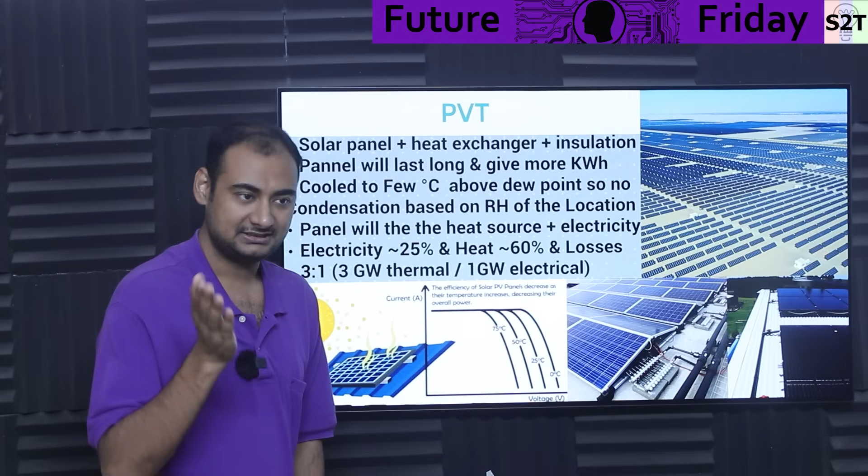You can pull vacuum on it and it boils away at, let's say, 15 degrees Celsius. You can do that. It will still take the same amount of energy when it boils away. So basically, you can change the temperature, but you can't change the phase change energy equation. So you need a bonkers amount of energy. We burn oil on this thing like there is no tomorrow. So we are talking about huge energy.

So this panel will give you energy, and this is where it starts to shine. Solar panels are not that expensive. Even a PVT panel with all the plumbing is only 2 to 3x the price. But here's the funny thing. From a solar panel's point of view, basically the sun dumps almost a kilowatt of energy per meter square. 25% of it will be converted into electricity. Because these are cooled panels, you will get that number. And heat would be 60%.

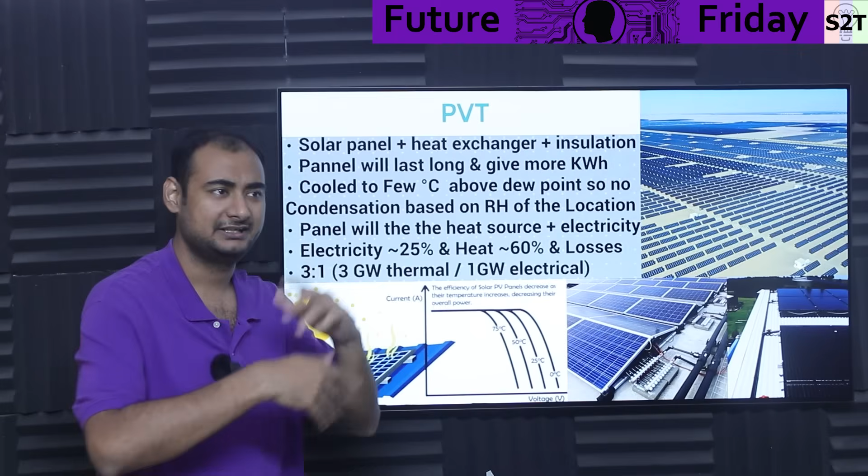Now, it's like, why is heat only 60%? Most of the energy would be reflected or leak into the ambient, so you will not get 100% absorption, so to say. However, right now, things that are in the market that you can just pick up a phone and order give you a 3:1 ratio, meaning if your plate capacity is 1 gigawatt hour electrical, you can easily get 3 gigawatt hours of thermal energy, meaning enough thermal energy to boil more than enough water for yourself.

That's the critical part. You're getting electrical energy and you're getting thermal energy. And thermal energy is what we need. Electrical is just a byproduct. And heck, 50% of it you will sell back. So fundamentally, why do we need to cool panels? Look into every solar panel. They will have something like this. Whatever manufacturer, whatever brand, they will always give you this temperature-dependent output.

And I have no idea what India is smoking. Our ISI, basically our standards body, rates the panels for 25 degrees Celsius. India is hot. 25 degrees Celsius is like a winter for us. Our summer temperature is 50 to 55 degrees Celsius. Cell temperature can easily be 70 degrees Celsius. So we need this graph, not working at 25 degrees Celsius. And again, these places are also dry. Not all the time, but sometimes they are dry, meaning that time you can cool it.

And yes, you will exceed the nameplate rating. Meaning if it's a 600 watt plate, you can get almost 750 out of it if you cool it. So cool it to 10 degrees Celsius, and you're getting more power. But again, we have to make sure that there is no condensation on it. Otherwise, salt will become a hassle.

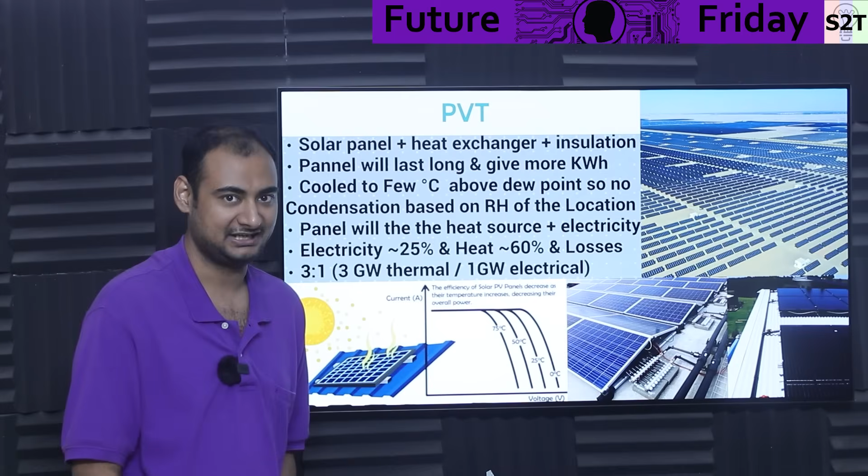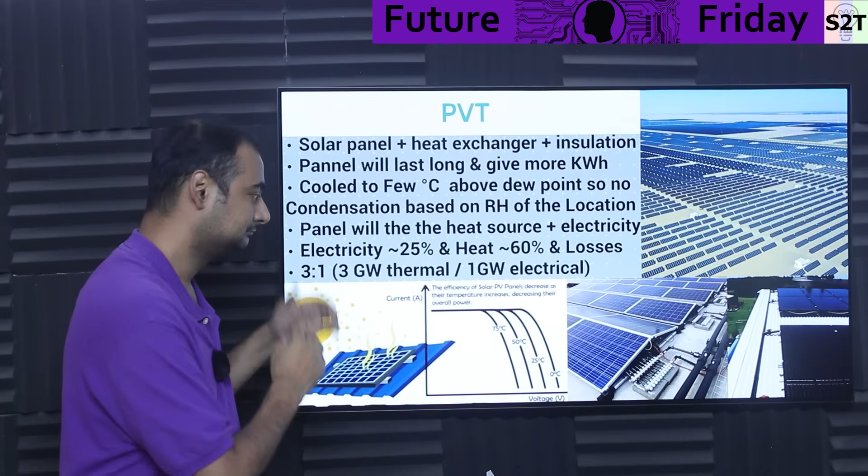So fundamentally, this is the source. It will give you electricity. It's not too expensive. It's long-term sustainable, and it does not leach your oil reserves. So that's the whole point. Nothing fancy, known technology, tested technology. You just have to assemble it. So this is step 1.

Step 2, you run a refrigeration cycle to leach all that energy away, because you can run that water system, but it will not allow you cooling. Basically, you will not be able to cool the panels. And there is a lot of energy. It's just that the voltage is low. So if solar panels can give you that kind of thermal energy, why don't we run a steam power plant with this? The problem with a steam power plant is that it requires a T delta.

A huge T delta, and the T delta on a normal coal power plant can be as high as 1600 degrees Celsius, meaning the flame is 1600 degrees Celsius. That's how you have high pressure water running in the tubes. They become very hot, and they are not only hot, they are also under pressure. Now you get superheated, supercritical steam that gives you the electricity, and that's only 30% efficient. So let that be very clear. You need bonkersly high temperature.

Here the temperature will only be optimistically 20 degrees Celsius above ambient. So if the outside temperature is 60 degrees Celsius, 80 degrees Celsius will be the water temperature. That is not enough to do anything, even though the energy is there. Energy-wise, shut up, take money, that kind of energy is there. It's just that we can't do much with it. You can run an organic Rankine cycle, but the machine will cost so much. It's like, bro, just buy more solar panels, it will be cheaper.

So we have the energy, it's just that we need a stabilizer for it, or a transformer. So ammonia is the transformer. Basically, for the amount of heat we are talking about, there are only a few refrigerants that scale to that level, and ammonia is the best in that. Why? Because panels need to be cooled, otherwise they will be cooked.

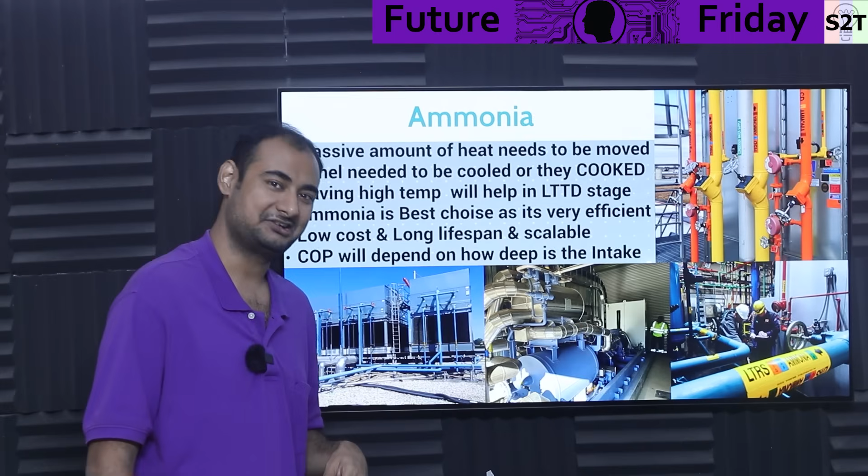And it's low cost. Like the larger you make it, the cheaper it becomes. Like a 10 ton AC, ammonia, don't talk about it. 100 ton AC, 1000 ton AC, now you're talking. 5000 ton, now you're really talking. So ammonia starts to make sense at those larger scales, and they have a very long lifespan.

They do have consequences. You can't use normal copper or brass tubing. You have to use stainless steel, otherwise it will corrode. But it does have a long lifespan. 30 years is like average, and scalable, meaning you can keep scaling that up. Like you can start with a 1 gigawatt farm output, then you can go to 2 gigawatt, 5 gigawatt, go YOLO on it. It is scalable.

And what about coefficient of performance? Because you do not want to burn all the electrical energy coming from the solar panel into the refrigeration. This depends on the depth, basically how deep you are pulling the water from the ocean. If you are pulling the water, let's say 20-50 meters deep, the COP would be good. If you are pulling from 400 meters, like in the case of India's low temperature thermal desalination, water temperature would be low, like 12 degrees Celsius low.

If you have 12 degrees Celsius water for your condenser, your COP would be 8 or maybe even higher than that, like 10-12 is possible, because again, panels are reaching 50 degrees Celsius. Your cooling medium is at 15 degrees Celsius. Heat wants to go. Refrigeration cycle is like, bro, go. So it will be ludicrously efficient. That depends how deep you want.

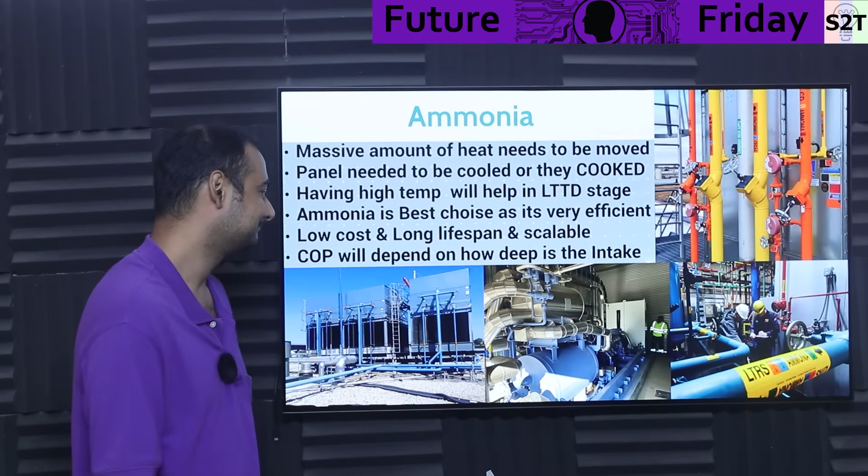Now, again, why not go very deep and get 4 degrees Celsius water? Problem is the pumping losses will start to pile up. So you want to go low, but not so low that all the energy you saved on the refrigeration, you end up losing in the pump. So there is a vector, basically based on the circumstances, based on the water temperatures, you can calculate what is the sweet spot.

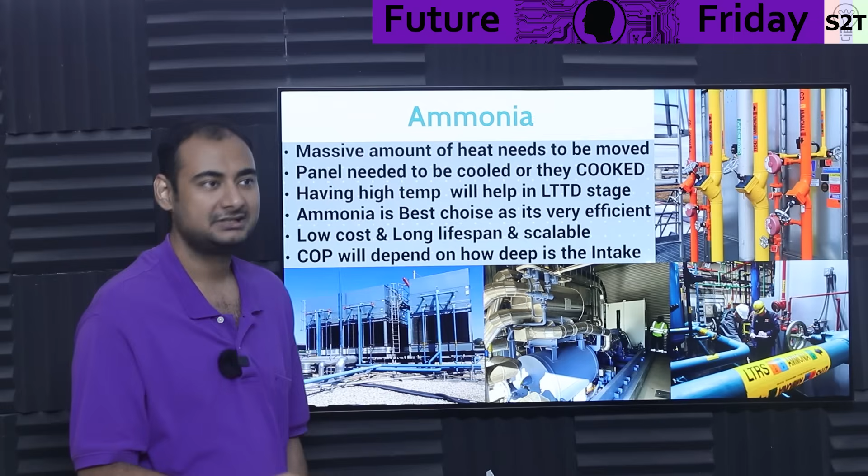But COP wise, you do not have to worry about it. You're going to easily start with 5 COP or 6 COP without any issue. So most of your solar energy, 50%, is completely free. You will not touch it. The rest depends on how well optimized the system is. So ammonia gives you that control. You can control how cool the panels are, and you can control how hot the hot end is.

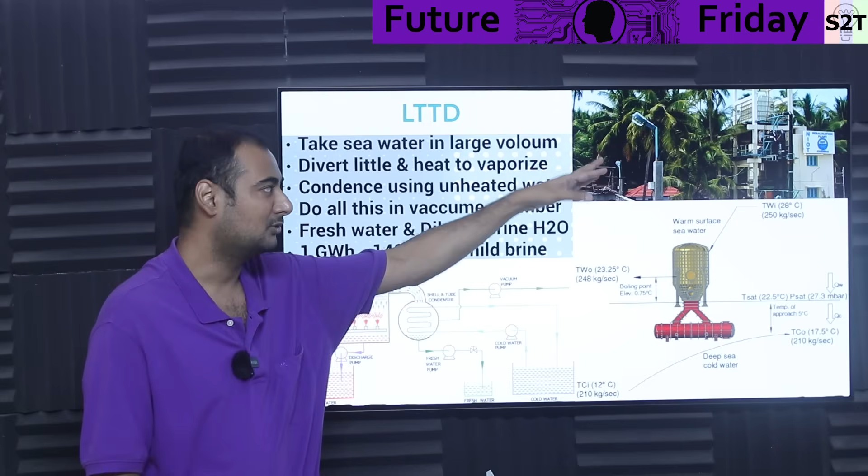Now we use that heat in what we call low temperature thermal desalination. So basically you take seawater in large volume, like bonkersly large volume. In India's system, that is like 400 meters, 12 degrees Celsius water. Now this is a small plant made for island nations. We have small islands. We wanted to make sure they never have to worry about water. We gave them that for 10 years. They're like, cool, chill. We don't talk about it because it works.

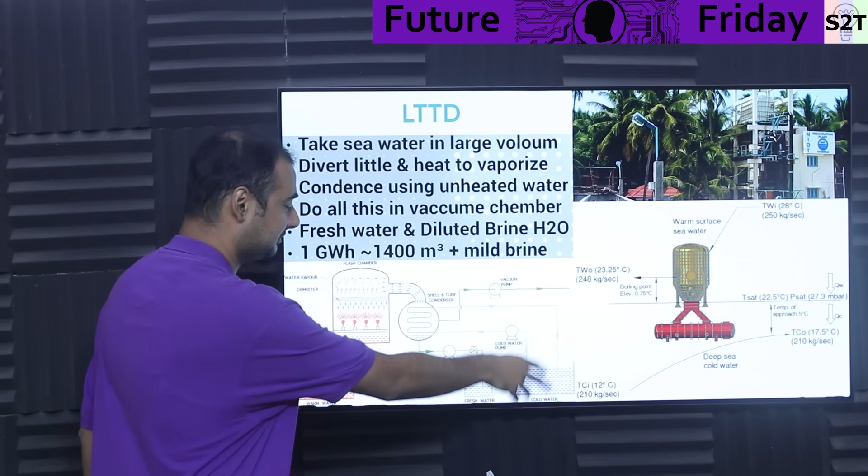So you have cooling water. Now that water goes into two sections. First the cooling; second, a very small portion you will leach out. That will become your heat for vaporization, meaning you put it in the warm water section. This is where your condenser is, the condenser of your refrigeration. So 12 degree water comes in and goes into your submerged condenser or heat exchanger, whatever works there.

And then you have hot water. Now how hot would it be? Not that hot. You only need to heat it up to, let's just say 28, 29, maybe 30 degrees Celsius. So fundamentally, this is where you dump the heat. Now, what happens to that water? Water is hot, but again, it's not going to boil. So you send it into a flash chamber.

Now, in the flash chamber, you pull a vacuum. And that vacuum has to be pulled through a wet pump. If you use a dry pump, it will clog up from water vapor. So it has to be a wet pump. So you spray the water. Once you spray it, some of the water turns into vapor. Most falls back into a collection sump and you recycle that water.

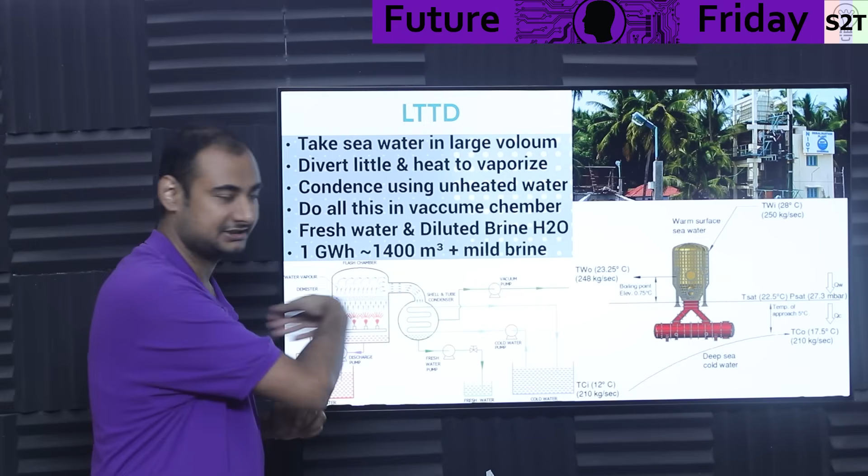Recycle does not mean I actually send it again to boil it. You do not want high brine content. So recycle simply means you let it go in the cold section. And the cold water cools the condenser, because if you do not cool the condenser, you will not get vapor, because again pressure will start to rise. So the condenser removes the energy, and again that condenser is running from the main flow of 12 degrees Celsius water.

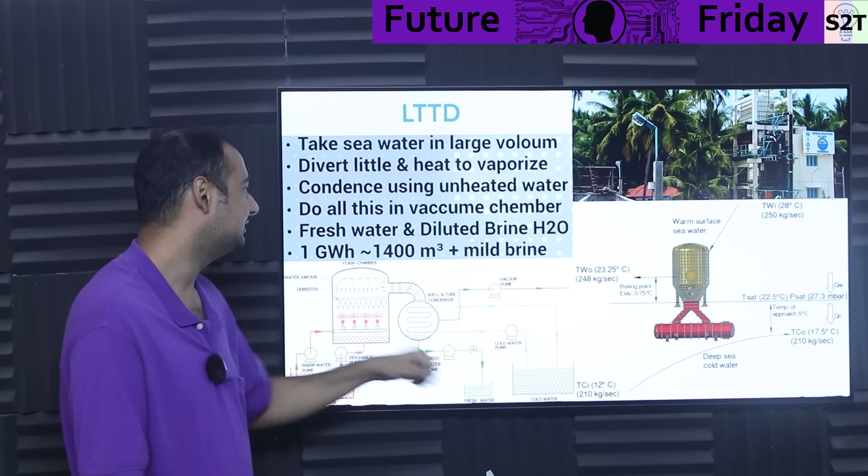Here you took that 12 degrees Celsius water, heated it up to 28 degrees Celsius water. That's how it got working. So this is the flash chamber. You run a vacuum pump. As long as the condenser is cool enough, the vapor chamber would be cool enough, low pressure enough, that whole cycle works. And again, it's been running for 10 years. We know this is ancient technology. So fundamentally, the condenser uses unheated water, and all this has to be done in vacuum chambers.

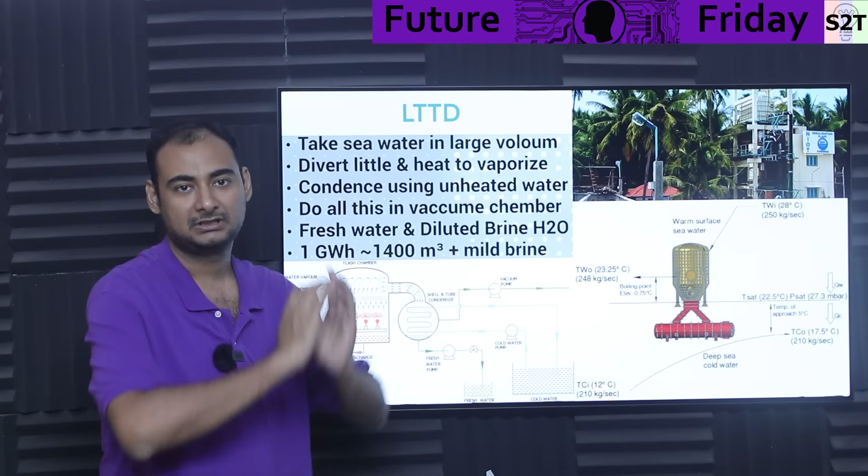And fresh water, you get fresh water, awesome. And then you get diluted brine based on the concentration here. Basically, if you are taking, let's say 1000 cubic meters per second, and you divert 10 cubic, very low brine. Even if 100% of that water is boiled away, you don't want that, because you do want brine to be in liquid state, so it's easy to return and does not clog up the equipment. And brine concentration is so little that from the sea life point of view, it's a bit hotter summer. So it's not that big of an issue.

And what kind of water output are we talking about? For 1 gigawatt, a solar farm that can be small scale, let's say 300 megawatt, it will have 1 gigawatt of thermal output. You are looking at 1400 cubic meters of water, with very mild brine. Brine is not an issue here. 1400 cubic meters. And that's just a small plant, because this will be scaling up a lot. And you are not running out of heat, not to mention in those places close to the equator, a solar farm will work for 7 to 8 hours.

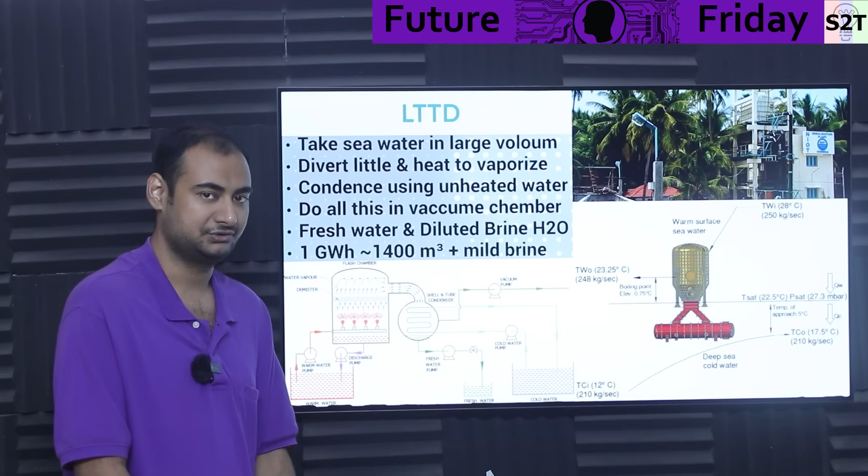And again, you do not burn oil for it, you do not contaminate the sea for it, there is no advanced membrane technology that you have to keep paying someone for, and there are no chemicals involved. You are not burning your oil, and you are getting 50% electricity left that you can sell to your grid without any issue. So this is the best way to sustain those people long-term without any hassle.

Now, what can we do in future? First, we have to move the thirsty industry, because there is a specific point in this region in Iran that has a steel plant. And if you know anything about steel plants, they require bonkers amounts of cooling. How the heck did somebody think that's a good idea to put there? So you move all those thirsty industries, industries that consume water for cooling, and shift them to coastal areas. And either you have a giant district cooling for those plants, with one dedicated giant low temperature thermal desalination, or each one of them can have it. Depending on the design and the economic conditions, you can decide.

That way you can make sure that thirsty industry, instead of drinking water, makes water. Because that requires heat. If you have waste heat that boils water away, why not boil water away in a sealed chamber where you're using water as a coolant? So fundamentally, cooling should not drink water. Let that be very clear. Cooling should not drink water, cooling should give you water if you are doing it right.

And how would you transport it? Now, this is the biggest stupidity that the Soviet Union created. I have no idea why Indians bought into it. I have no idea why Chinese bought into it. I have no idea why Iranians bought into it. It's like, what if we created a canal in a hot country? Like, bro, it's hot. And it's not Fahrenheit hot. It's Celsius hot. It's freaking hot.

And people are like, what if we drain river here? It's like, bro, it will just boil away. Nothing else will happen. You're just going to have water gone. So thankfully, I have to say, Iran has understood that was stupid, and now they are building pipelines. It has to be pipeline. You cannot have water exposed to the air and sunlight.

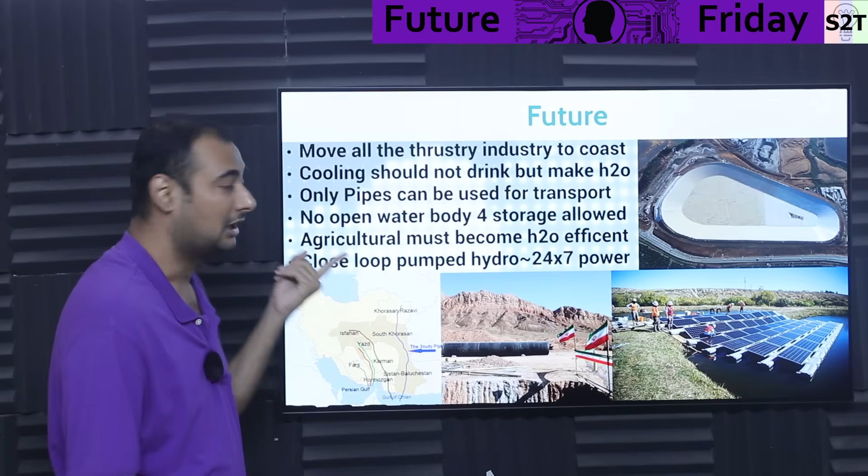First you will create as much water as you can. You take care of essentials. What after that? You have to store water at some point. Well, you have to make sure that under no circumstances you put it in open bodies. Even if you have something old, like, hey, we have this lake, what if we put water there? No. The best place to put water in Iran's case, because they have drained so much of their aquifers, basically underground water reserves, their ground is sinking.

That becomes the best place to put water in, because A, it has an inbuilt distribution system. You do not have to worry about it. B, it has bonkers capacity. Like, you can keep pumping water there and never even worry about it. If you keep pumping water there, it will drink a lot. You do not have to worry about it.

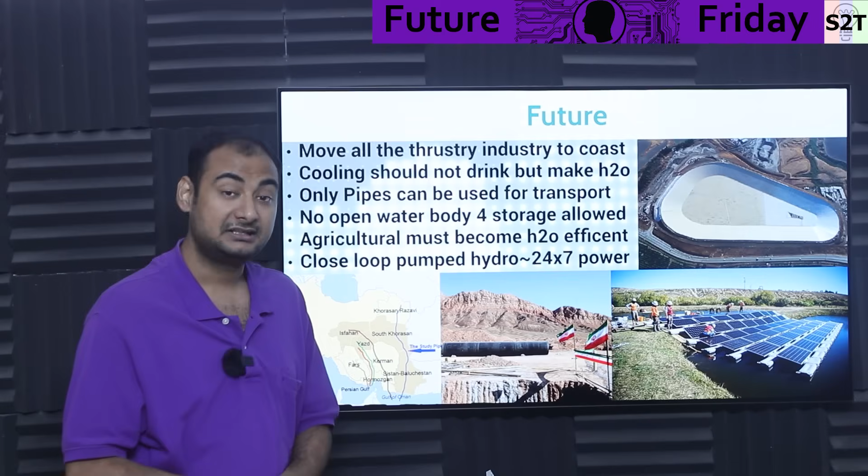Now, agriculture, that was the weird thing. Heck, India does have far higher water content than Iran, and even we are switching to drip irrigation to improve water efficiency. They have to do that. And find someone who the heck can explain to me why they are farming watermelon in Iran, sugarcane in Iran. I'm like, but again, they can still do it as long as they are water efficient. They have to be efficient.

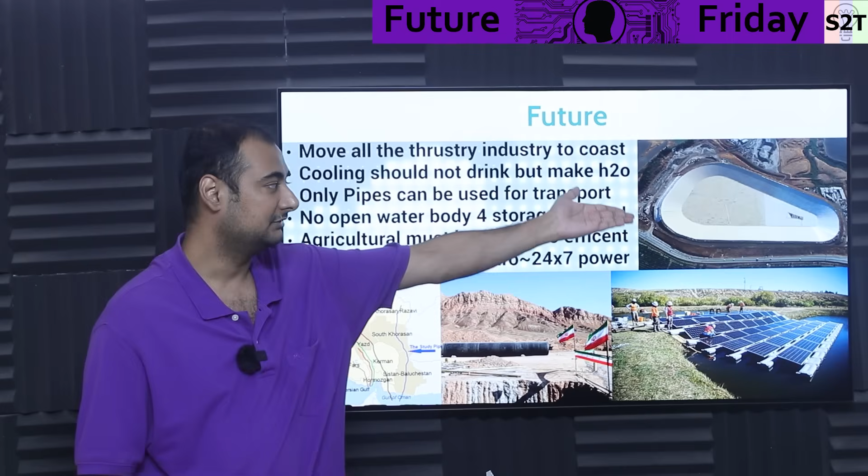Now, what if they want to reduce their oil consumption even more? Again, more selling oil, more profit. They can go with this route. This is Israel. A Chinese company built this. This is a closed loop pumped hydro, meaning you get power from solar, you dump it here, and during night time, you just let it run. And again, it gives you grid inertia. It does not have a lifespan limitation.

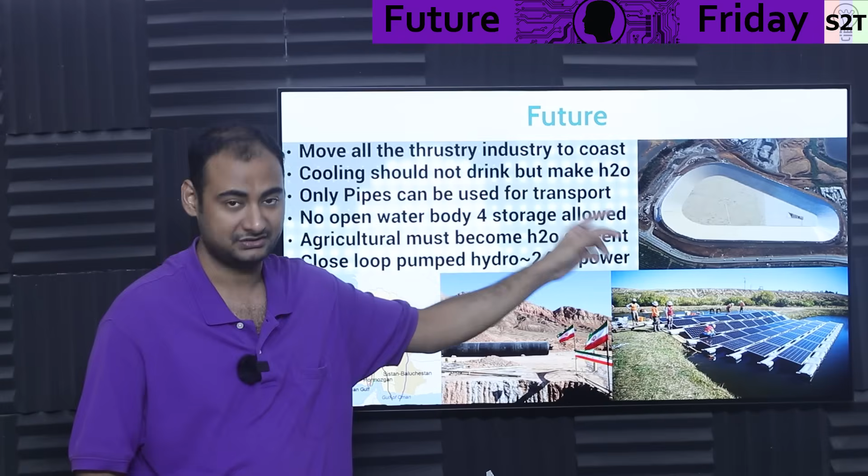The only penalty versus a battery system: battery is a bit higher efficiency, as in round trip efficiency is 90 to 95%. Here, you're going to be lucky if you get 80 to 85%. But again, this will last forever as long as you keep maintaining it. We have older ones made in the era of what we call nuclear fever, 1950s, and they are still working. So that's a very long time.

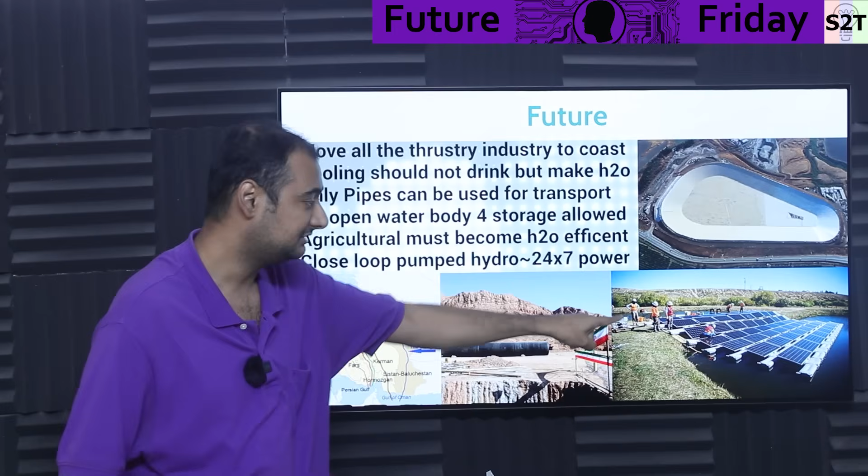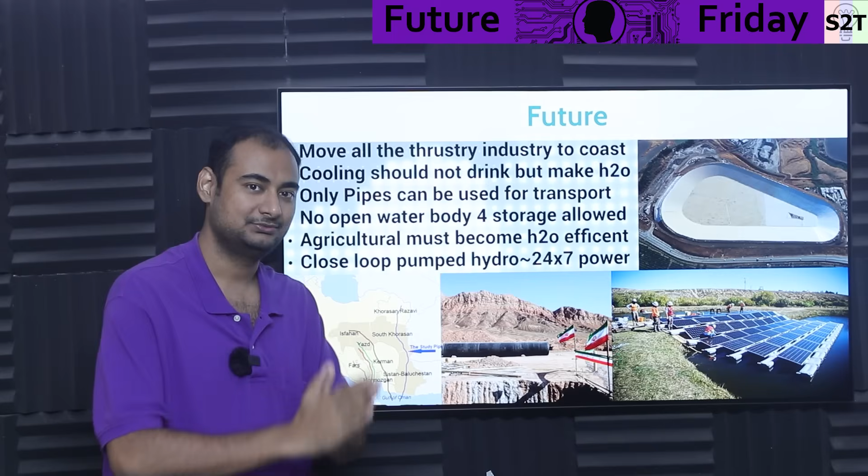And again, if Israel or Egypt have to do this, they have to cover this part with solar panels. They cannot have naked water bodies. So that's the first thing. That way they can reduce their fuel consumption even more. Of course, they will have the power plants. Everything is fine. It's just, most of the time, why burn energy when you don't have to? Sell, make more money, let everybody suffer. You be economical. And from an environmentalist point of view, be economical.

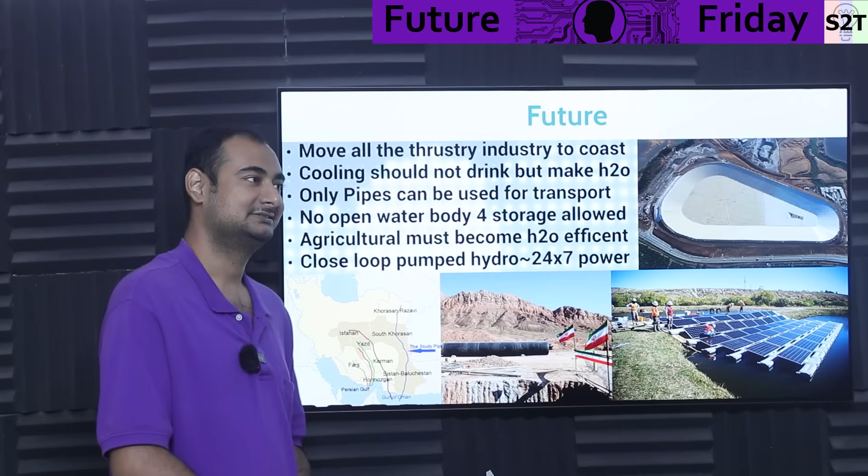So there are a lot of options. Let that be very clear. It's a solvable problem. It's just that dictators have to understand that fighter jets are more expensive than solar panels. They have to really understand that. So this was my presentation on how to solve the Middle East. Again, it will not solve landlocked countries. I have no idea what to do with Afghanistan, but it can take care of all the sea nations. So this was the presentation for that topic.